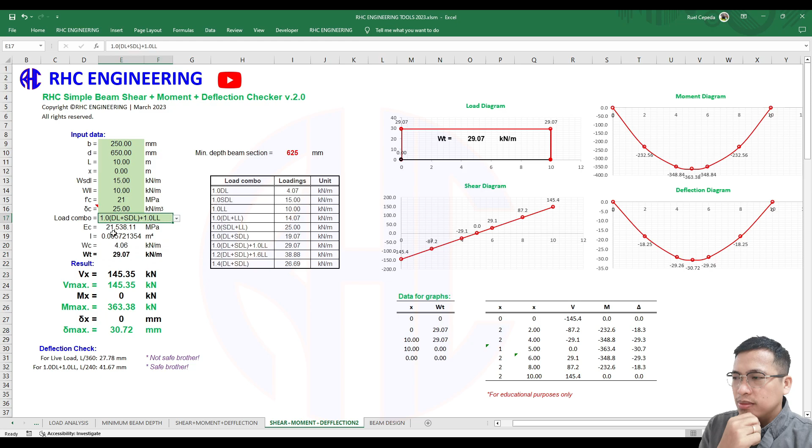Then, we have here the load combination. If you notice, let me enlarge it. If you notice, I provided DL is DL, because that DL is the self weight of our member, the beam. This SDL, these are the finishes, tiles, MEP, and the superimposed dead loads.

Here, this is just the live load. Then this one, service load, combination of dead load, self-weight, plus the live load, if you need it. Then of course, DL plus LL, up to this ultimate load combination.

If you notice on the left, on the right side, I indicated here the minimum depth beam section as per the ACI. So every time we input data here, for example 15, this is our main reference. Our input here should not be lower than 938. So if it's like this, about 950 or 1,000 should be your beam depth.

For example 5, your beam depth minimum should be 313 or approximately about 350 or 400. So we already have a reference.

Then below that, this is our table. The load combo, then the equivalent load combination, load value in terms of kilonewton per meter. So this means this is fixed here. Then every time, whatever value we get here, it's using VLOOKUP, VLOOKUP, then it checks the value next to it.

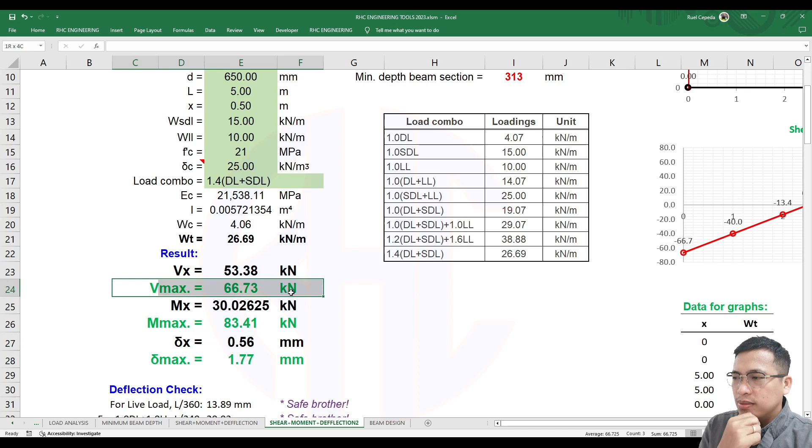I also provided the maximum shear, maximum moment, and maximum deflection. So this is our formula. That's just 0.5, then WL. The total weight times the L.

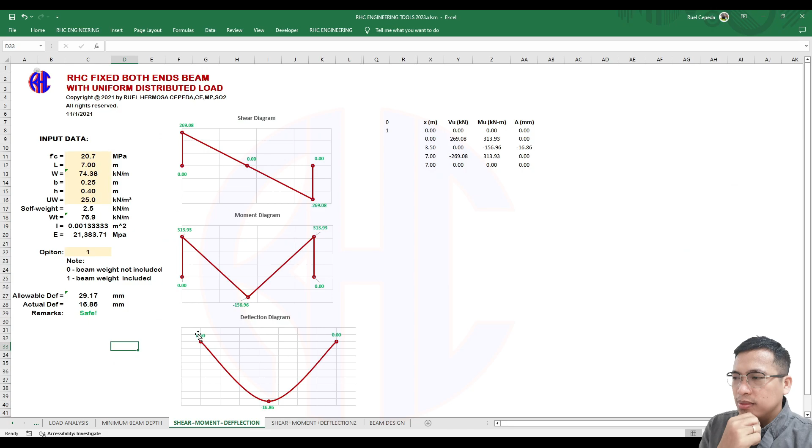This is simply supported guys, ha. Because this is fixed end moment. Fixed end moment. So considering the simply supported beam, this is commonly used for precast. Then for our deflection, this is the formula.

Then, we have here a deflection checker for our deflection value. Because as per ACI, in terms of live load only, due to live load, the allowable is L over 360. So when you check the deflection of your live load, you should change the load combo into live load only. So you'll notice, the allowable deflection is 13.89 whereas the maximum is only 0.67. But if we increase, let's say, increase this to 15.

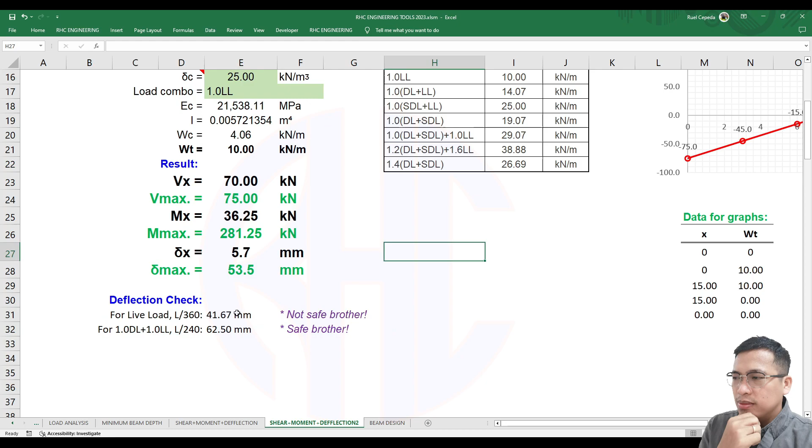See? Not safe na siya. Kasi yung allowable natin for the live load is 41.67 lang whereas yung maximum deflection natin is 53.5.

Then kapag i-check naman ninyo yung service load ng dead load plus live load, actually dapat ano to eh. To, DL plus additional.

So ibig sabihin, we need to change the load combination to this. So yung allowable niya is 62.5, pero yung max natin is 155.51. So medyo malaki, kaya not safe siya.

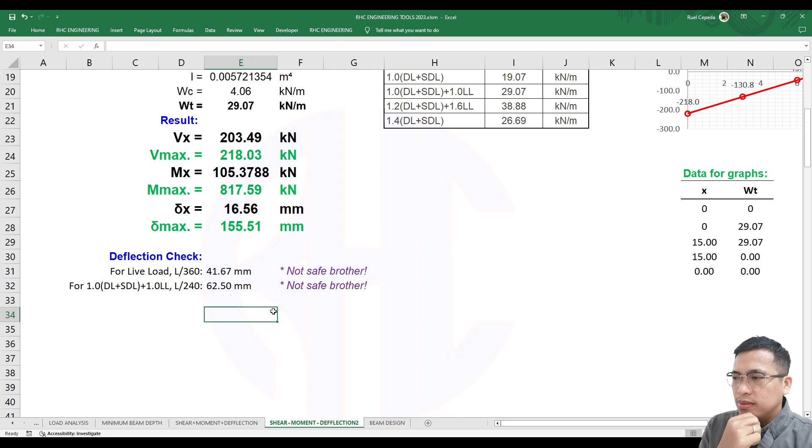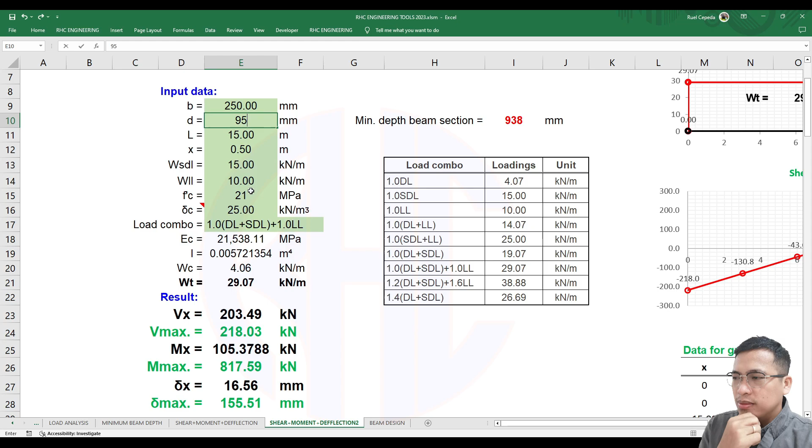So ang gagawin natin para ma-satisfy siya, tingnan ninyo to. Minimum beam depth section is 938, pero yung na-provide natin is 650 lang. So it should be 950. Check natin to, tingnan ninyo.

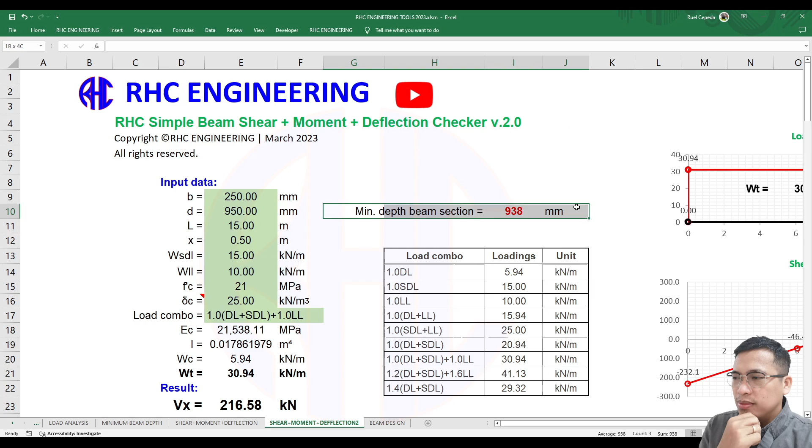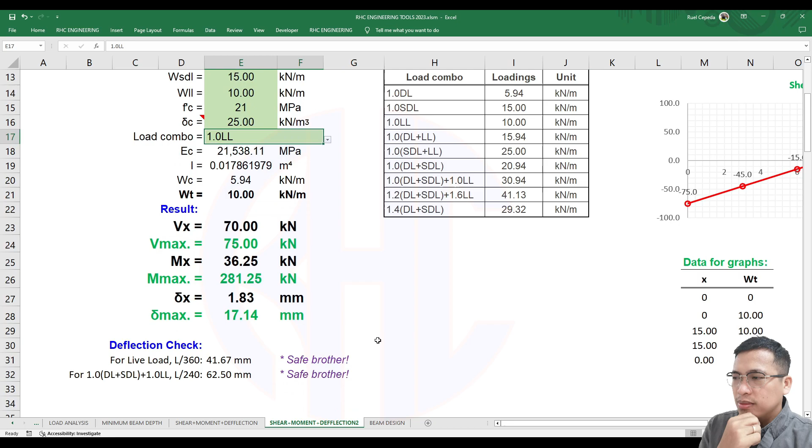Nag-safe na siya. As per ACI, hindi malayong papasa ka na sa deflection kapag masunod mo to. Change natin to at sa live load, check natin.

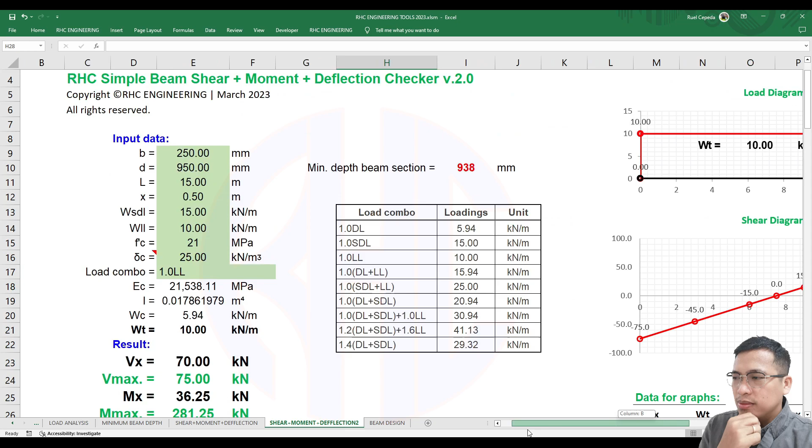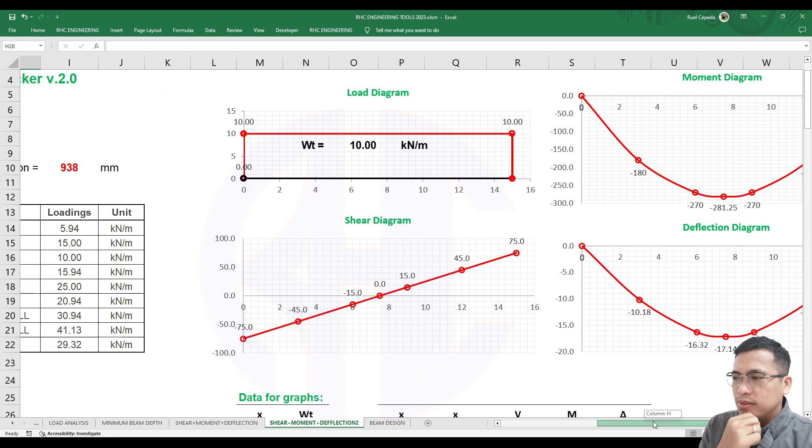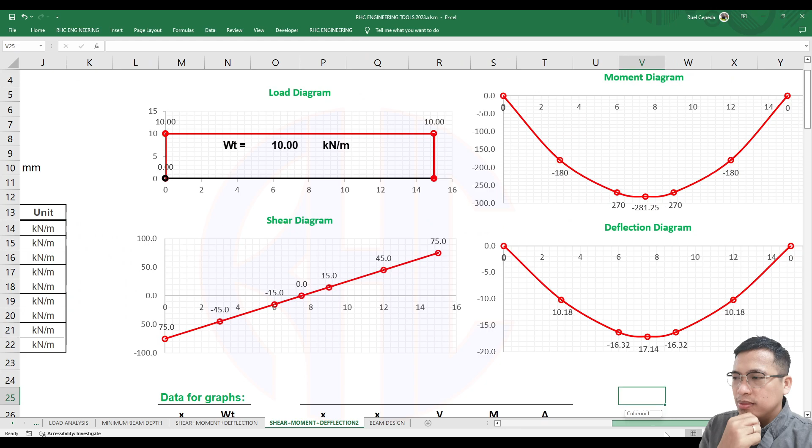Nag-safe na siya. Punta tayo dito sa diagram. Medyo mas detailed to, guys. Every time mag-change ako ng data doon, automatically mag-change to depending sa loads at input data natin. Meron tayong load diagram, shear diagram, moment diagram, at deflection diagram. Hindi to scale, pero ito yung approximately figure ng diagram natin.

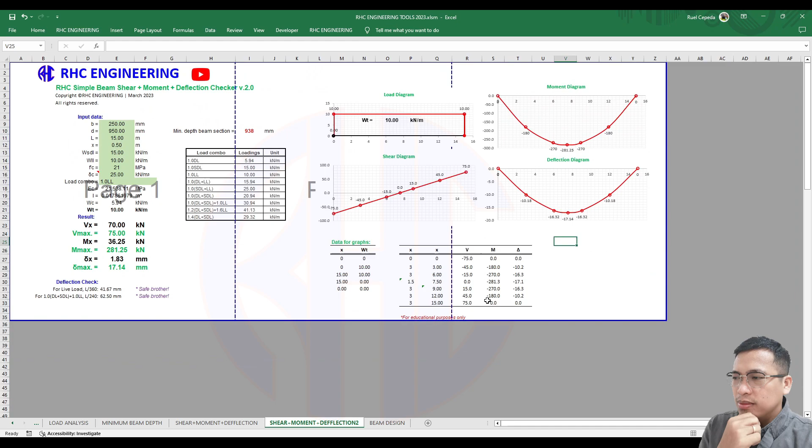Adjust lang natin to, or tanggalin lang natin to. Every time mag-change ako rito sa left side value.

Let's use 300. Automatically, tingnan ninyo, yung deflection is lumiit na, naging 14.28 na lang. So ito yon guys, nakadepende siya rito.

Let's use 10 meters. Lahat sila mag-change, then this is the maximum value. Maximum load natin is 10 lang, which is ito. Kapag i-change natin to into 1.2 DL plus SDL plus 1.6 LL, automatically mag-change siya. Ito yung value natin.

Paano yan ano, paano yan natin makikreate? Madali lang yan guys. Halimbawa, ito gusto kong max na lang, highlight natin yan, then right-click, copy. Then paste natin, paste special, tapos link picture.

Every time mag-change tayo dito ng value, halimbawa ito. Nag-change siya guys, pero picture siya. Itong kagandahan ng nakalink na picture. See, tama, no?

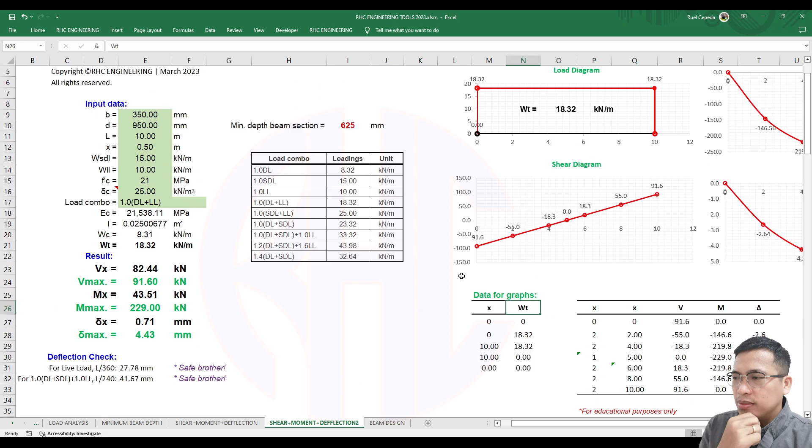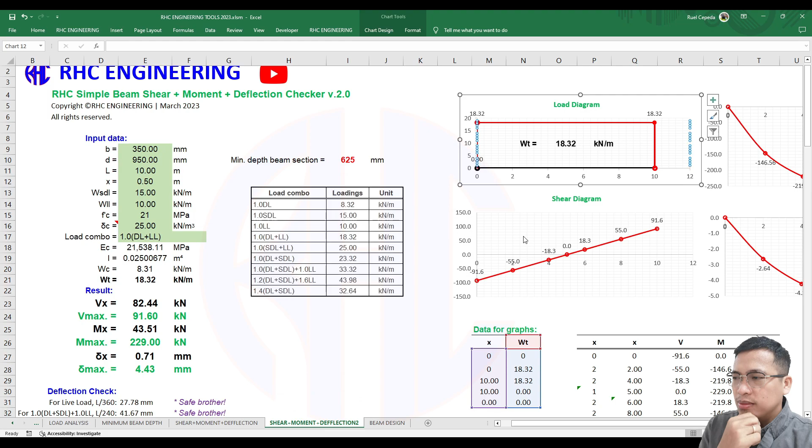Ito pala yung graphs natin para sa X and the weight, para sa load diagram natin. Kapag i-click natin to, then dito sa select data, as you can see, ito yung naka-pair. Dito naman, of course, sa shear diagram natin, ito yun.

Then para sa moment diagram natin, ito yung naka-pair na X and then the moment. While the deflection, ito yung X and deflection, guys.

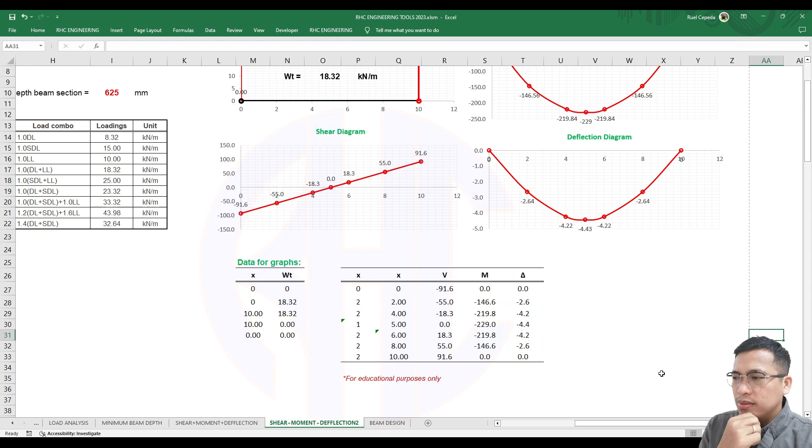Ito, free to sa mga members na. Ito gagandaan guys, every time mag-change tayo dito ng value, magkakaroon tayo ng updated na diagram.

Let's use 15, then change natin load combination. Updated siya guys. At the same time, meron tayong minimum beam section depth, then also the deflection for the ACI.

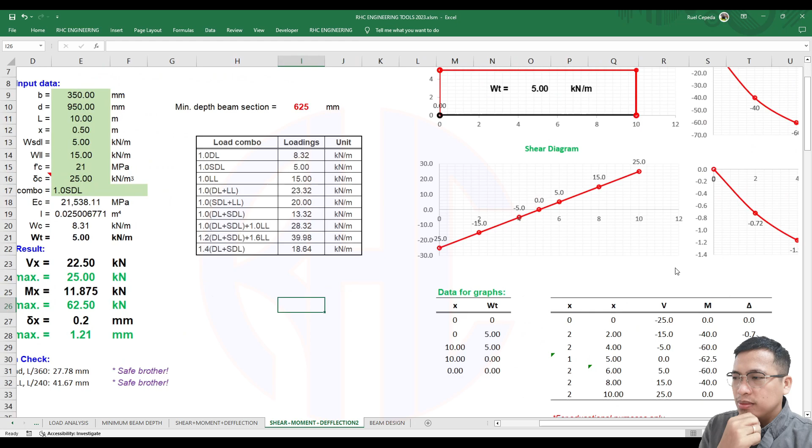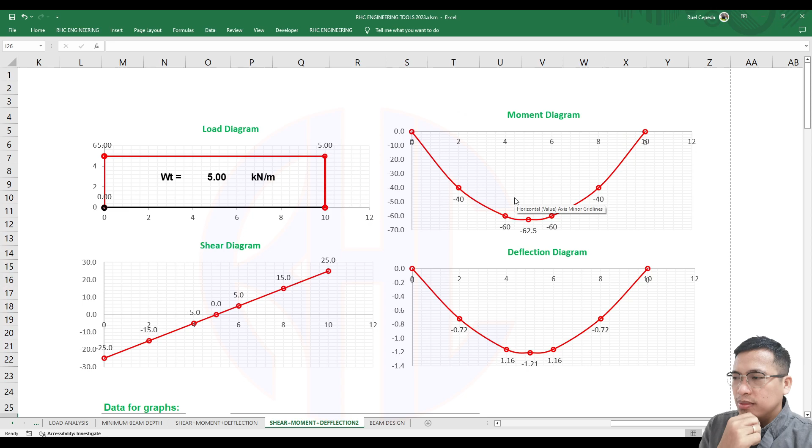Makukuha na natin yung maximum moment, shear, and deflection, which is magamit na natin dito. Pero pag simply supported guys, ang madidesign lang natin dyan sa main bars ay yung maximum moment, ibig sabihin, nasa midspan lang yan.

Next tutorial natin is for the shear design, pero ang gagamitin natin is the simplified form lang. Then the next time, yung isang form naman. Pure shear lang muna.